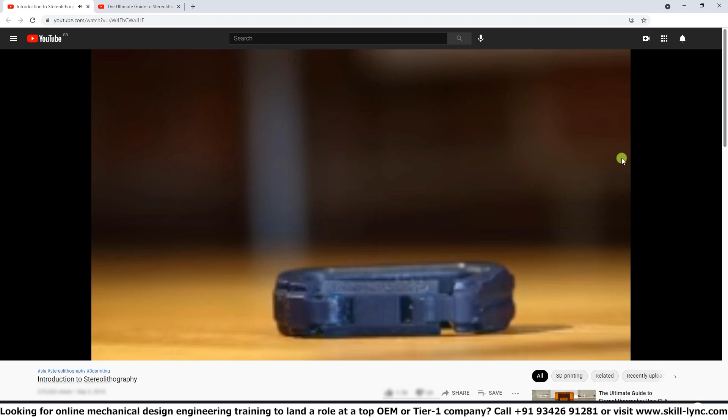And this has been a different kind of resin that's more solid. It's a bit stronger, more resilient to impact, right? It's not flexible or soft. You can hit it with a hammer and it can take the shock and impact of that.

See, so over here, what they're showing in the video is, if I can go back one frame, this part has been produced through stereolithography, so you can sort of see that the surface is quite smooth, whereas this part over here has been produced using fused deposition modeling. So what we previously discussed, yeah, with melted filament. And you can see the surface finish is not of the same grade. That's one of the main differences, or why you would select stereolithography over fused deposition modeling.

But again, there are some disadvantages of SLA which would lead you to choose fused deposition modeling over SLA, such as always having the need to post-process your parts in SLA. Sometimes in fused deposition modeling, you don't need to post-process your parts, right? If you're happy with the surface finish, or if you want just a quick rough part to be produced, you can do that. With SLA, you still need to rinse off all of the excess resin and whatnot.

And also, SLA produced parts are prone to UV degradation. So if you wanted to put your SLA parts in direct sunlight, they will change color, they will become brittle, they will actually degrade over time because of those UV rays present in sunlight. Whereas in FDM, thermoplastic filament, it's more sensitive to heat, right? Because you use heat to melt it.

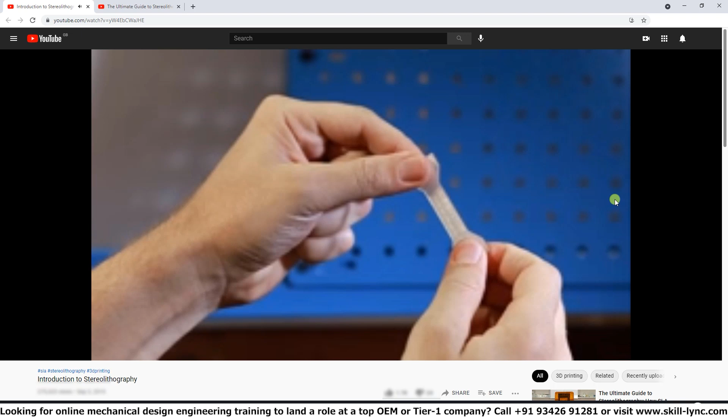Here, what they did is they produced this using FDM, using thermoplastic filament. So they just showed how weak the layer lines are, how weak the bonds are between the layers of the 3D printed model. It's quick to snap, because obviously you print one layer, and before you print the next one, this layer has already cooled partially. When you deposit the next layer on top, they don't fuse together 100%, they only partially fuse together. So that introduces some level of weakness along the build direction.

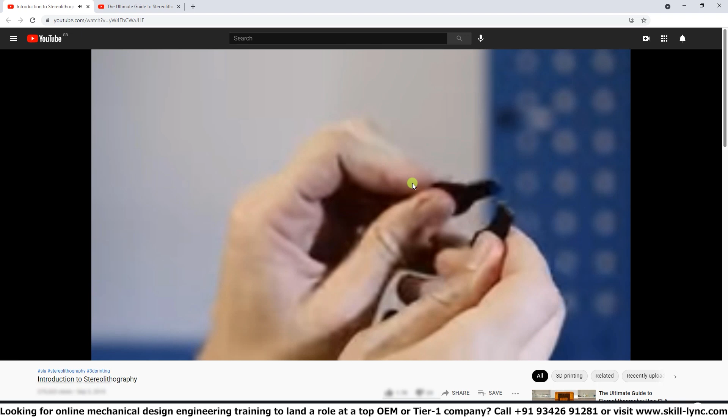Whereas SLA produced parts, because it's a chemical reaction the resin has with the UV, it's not melting, it's actually chemically hardening each layer on top of the next. They fuse much better. So as you can see, it doesn't snap as dramatically as the FDM produced part. But it also snaps. They're also relatively weak as compared to selective laser sintering and selective laser melting, which actually use metal, and they also form much better bonds.

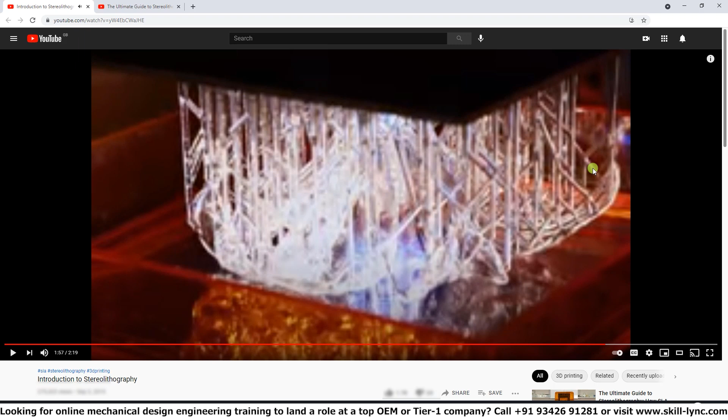So this is the build plate rising and pulling the model out of the resin bath.

So yeah, that's stereolithography. Let's see if we can get something out of the second video as well. So you can see this is not the actual printing speed. This is a sped up version of it. It's more of a time lapse.

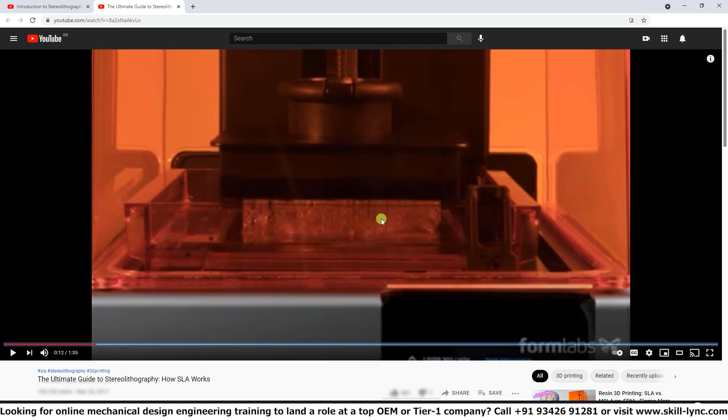Unfortunately, it's not as fast as in this video. This is a sped up version because otherwise the video would be 30 minutes, maybe 1 hour if it showed the whole process in actual real-time speed.

Because obviously it cures it with the UV laser, but then it needs to accurately move it out to prepare the next layer. It needs to wait a bit before using the laser again, and the laser needs to shine for a set amount of time into the resin for it to harden, right? It can't just briefly flash onto the resin.

It's a very controlled, accurate process: how long the laser needs to be shined on a particular area in order for the resin to harden. And there are differences between each type of resin that you obtain. You can change all of these parameters within the machine. Obviously, each machine is different and they have different powers of lasers.

So there are many differences between machines, between materials, between manufacturers that you can play around with and tweak in order to get the best built parts, the best effect or the best manufacturing process.

When you buy SLA machines, they give you an instruction manual. They give you some recommended settings. They give you some recommended materials or material suppliers to obtain the resins from. Some resin suppliers also give you some parameters to use with their resin, but experimentation is key in this part. Tweaking some of the parameters can help produce better parts, but this comes with many hours of experience using these technologies.

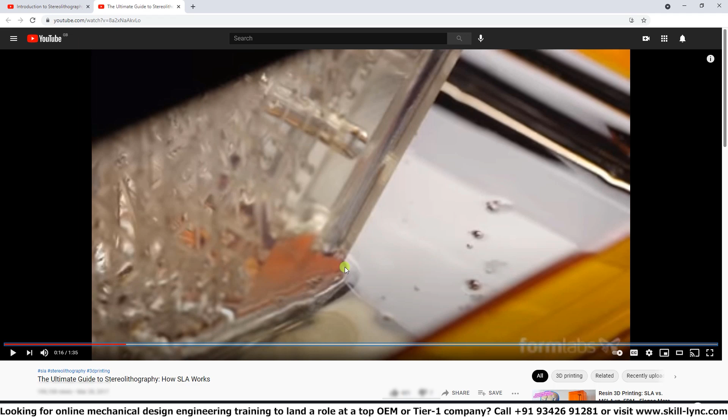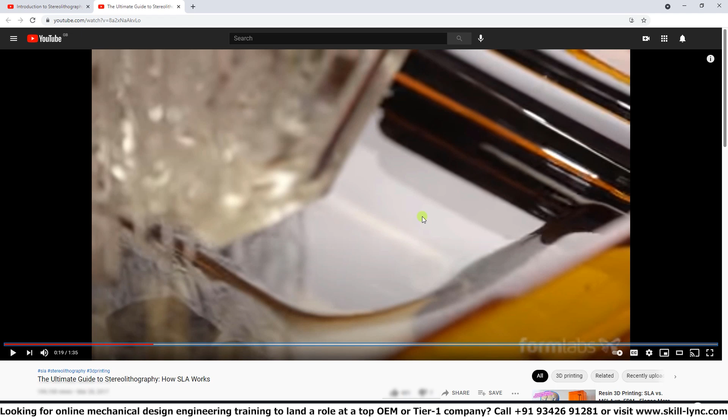Some stereolithography machines have a little roller, or arm, that goes across the surface in between layers to remove air bubbles in the resin, to smooth the surface, to produce better parts as well.

Some resin machines, you pour the resin, as we saw in the previous video. Some resin machines have cartridges of resin. So it's similar to an inkjet printer where you change out the ink cartridges. You can do the same with this stereolithography machine, right? You can insert a cartridge of resin if you don't want to pour or handle the resin yourself. But these tend to be a bit more expensive.

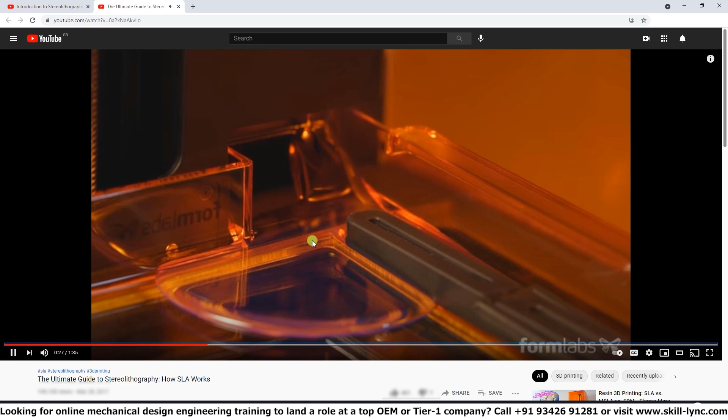Also, some SLA machines shake the resin bath a bit to get rid of bubbles that are inside, because you don't want to have a bubble in between your build plate and the glass, where the laser shines, because if a laser shines on this bubble, it won't harden it, right?

It might harden the surface around the bubble, but it will be an imperfection in your model, and it can look bad. It can produce a rough surface finish, and it can also make your model weak. So bubbles are not good in this situation.

This is how the laser actually shines through, and you have some mirrors that reflect and direct the laser to the specific areas that need to be hardened. If I go back a bit, that's the transparent window over here. So this is the bottom of the resin tank, and the laser lies underneath that.

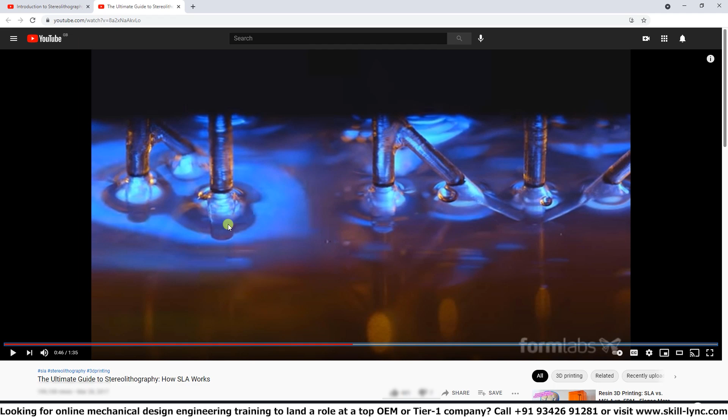You can see this bubble over here could actually produce an imperfection on this surface of the model or of the support structure, which is not ideal, but that's the laser tracing and hardening the cross section of the model.

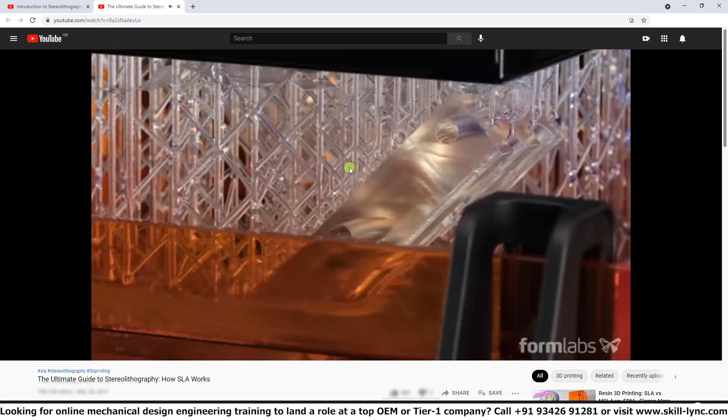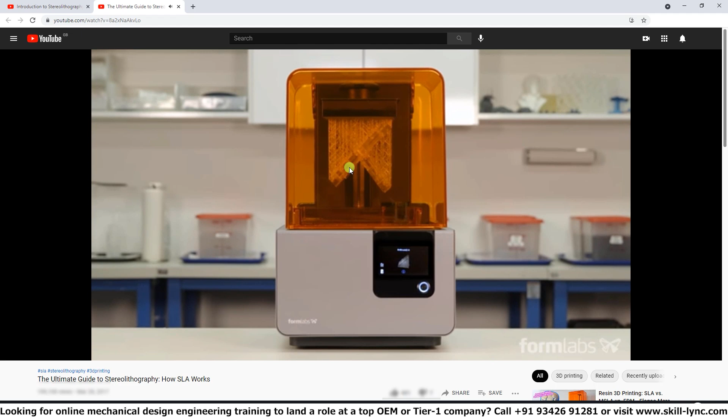So as you can see, the printed part will always be upside down, just because the build plate would be, let's say, the bottom of the part that you're building, and we'll pull it up. Again, you can see the support structures supporting each layer, because if you wanted to, let's say, harden this area over here and you didn't have support structures, it would just fall down and stay in the resin bath. Whereas here it can be attached to the build plate using the support structure.

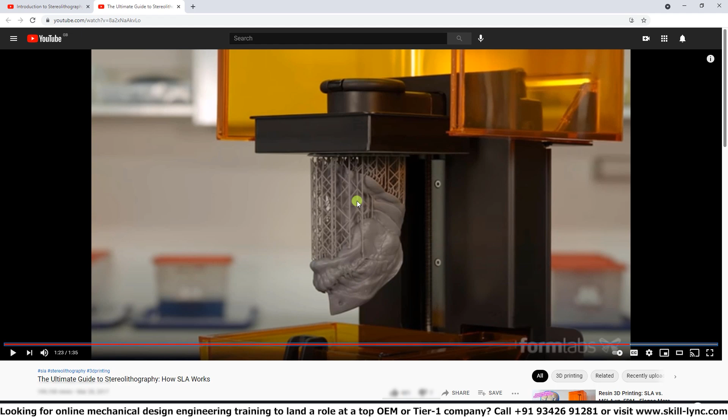So this is an element of design that needs to be considered when using this technology. You can see that most models tend to have these support structures included. Generally, in most cases, because you still need an element of post-processing for rinsing these parts, they tend to also add support structures. Might as well go all the way and add these features, because you'll be removing them at the end anyways.

So yeah, that's been stereolithography. Let's move on to the last technology, which is laminated object manufacturing. This is the one where you have laminate sheets that are cut layer by layer with a laser. This one is not as prevalent or common in the additive manufacturing environment. The main ones are FDM and SLA for hobbyists or enthusiasts, and professional versions of these are used in industry as well to produce models and end-use parts or casting molds and whatnot.

Selective laser melting or sintering is not available to hobbyists or consumers just because of the price. They're several thousand dollars. The equipment and the powdered material itself is also expensive, but they are very prevalent in industrial applications. Laminated object manufacturing, because of the bulk of the equipment, is not generally found in hobbyist or consumer environments. It's mostly industrial, but because of its limited applicability, there are limited industrial applications where this is used.

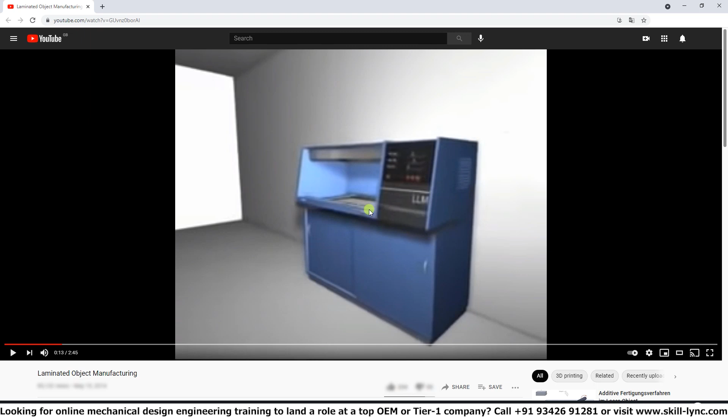Now, let's see if we can find a little video. Here they list it as layer laminated manufacturing, which is just a different way to say laminated object manufacturing, but it's all the same. So you can see this would be quite a bulky unit, because you need to store the layer rolls, the feed spool and waste spool, and as you will see, each layer has to be traced out. You trace out the box for the layer to remove it from the laminate roll, and that stays there, so it encapsulates the whole part in a block of material. You'll see that in this video.

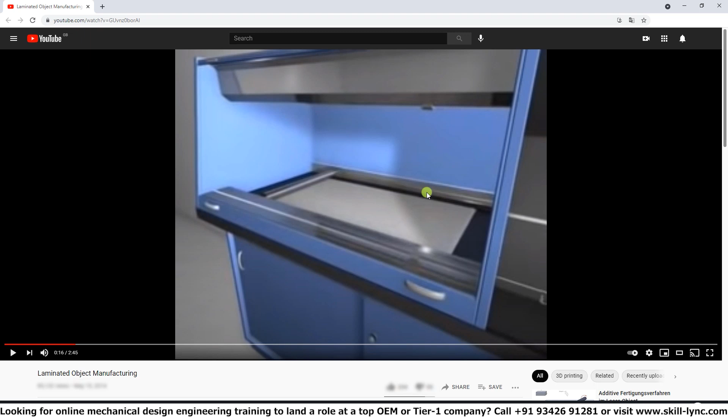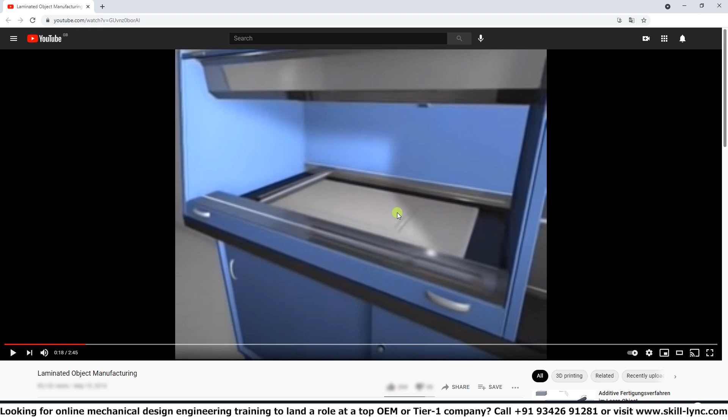Over here, the feed roll and the waste roll are in this cabinet underneath. You won't see them, you just see the workspace, and the sheet present in the workspace to be worked upon. Right now, you might not see it, but there's a laser here which is actually cutting the cross-sectional area and the box from the laminate sheet.

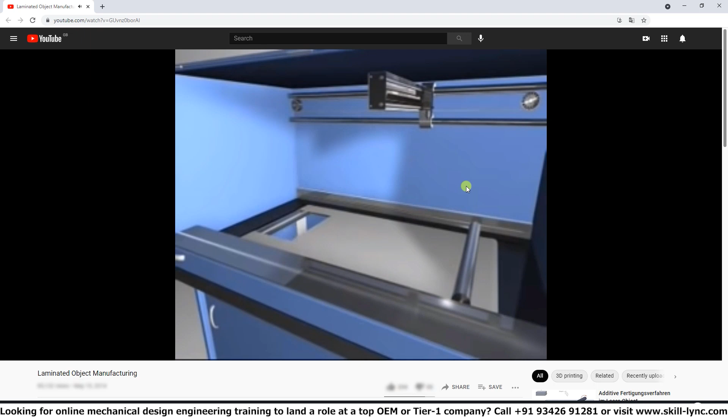And then it goes down, and as you can see, it traced a little square encapsulating area for this layer. As it moves on to the next layer, it moves the build plate down one layer, rolls a fresh layer of the sheet, moves a heated roller on top to melt this new layer onto the old layer, and now with the laser it will trace the new cross-sectional area, cutting it into this second layer. And it keeps going back and forth until all the layers are complete.

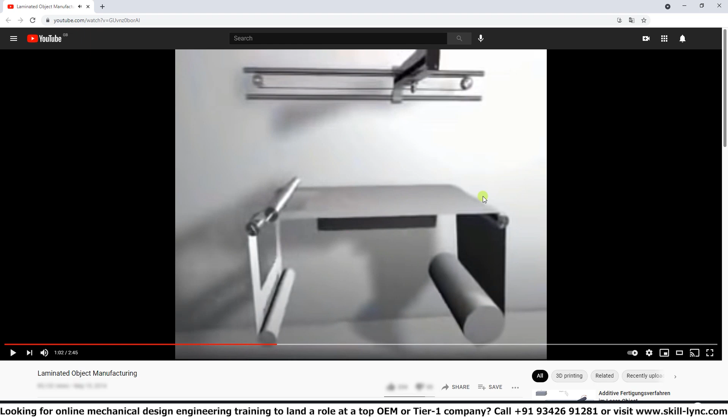Okay, now we can see behind the scenes, behind the cupboard: the feed roll, the waste roll, and how for each layer a square is cut, because it has to bond to the previous layer, so it helps with removing the part from the whole block, since the heated roller bonds each sheet of laminate material to the previous sheet. And it always cuts the same cross-sectional area of the block because it's melted on top of the previous one, to be able to move the layers down.

Again, as per most models, it has 2 degrees of freedom over here on the laser, the back and forth and towards us and away from us sort of movement, so the X and the Y. The Z again is produced by the build plate moving down.

These lines, it hashes, it creates a grid around. So this is over here in the center, that's the cross section of the part per layer that we want, and this cube or grid around it, it's sort of splitting the surrounding area in the layer to be able to be removed more easily.

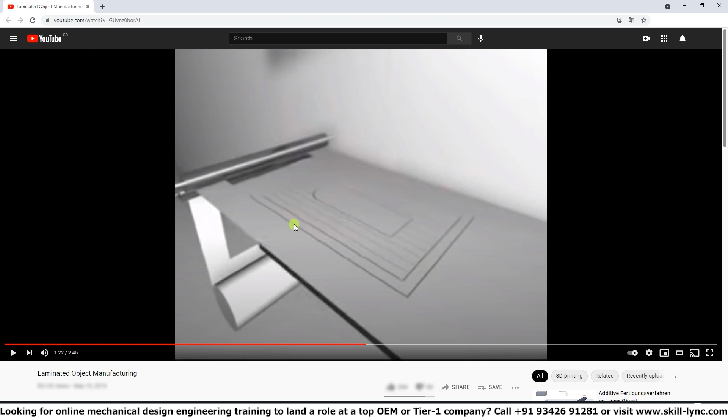Obviously, it cannot just cut the layer itself. It needs to cut the whole block, because if you imagine, let's say, you're creating, as an example in geometry, an upside down pyramid, because each layer the cross-sectional area is larger than the previous layer, this would jam the machine. It wouldn't be able to actually pull the layer down.

So using this method of actually cutting out the whole rectangle to create a block, this gives us more freedom of geometry, although post-processing will be a lot more difficult. You'll see once all the layers have been completed how we can actually remove it. So obviously you don't generally see the feed and the waste rolls, you just see the workspace environment.

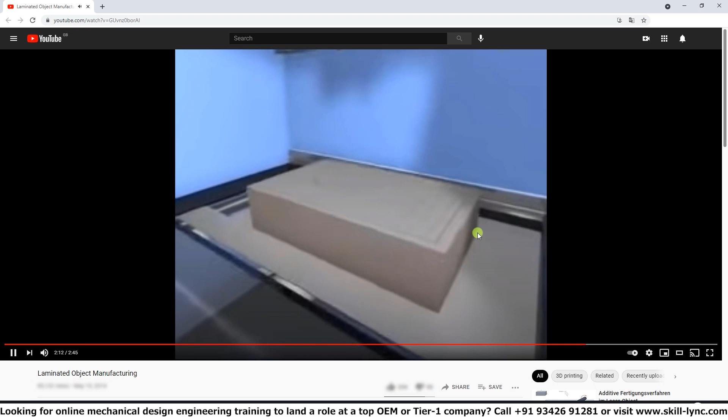There we go. So over here, this is the block that contains our model that's produced at the end. And as you can see, because you cut a grid, it's easier to remove all of the excess material and remove your model out at the end.

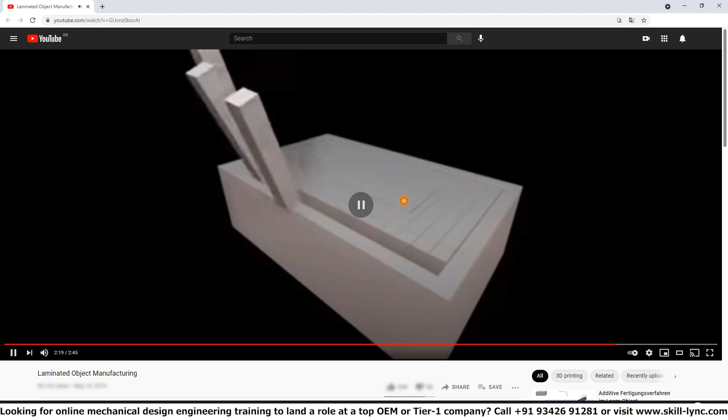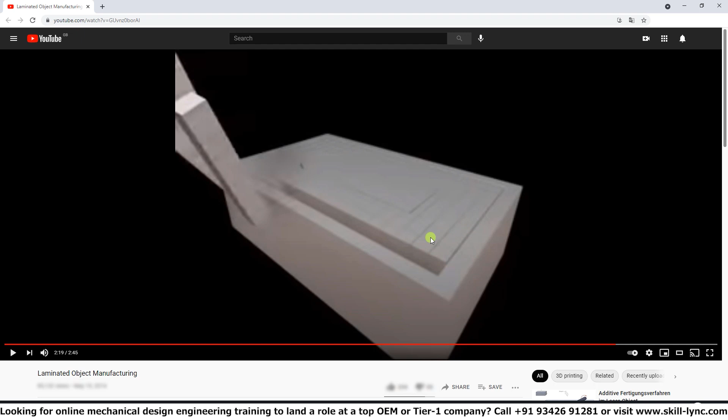But because the cube that contains your model has to be relatively large in laminated object manufacturing, this can lead to a lot of difficult post-processing, because you have to remove all of the surrounding material that's not part of our end model. And then we can remove our model and trim away all the excess material from our model, until we end up with our finished model.

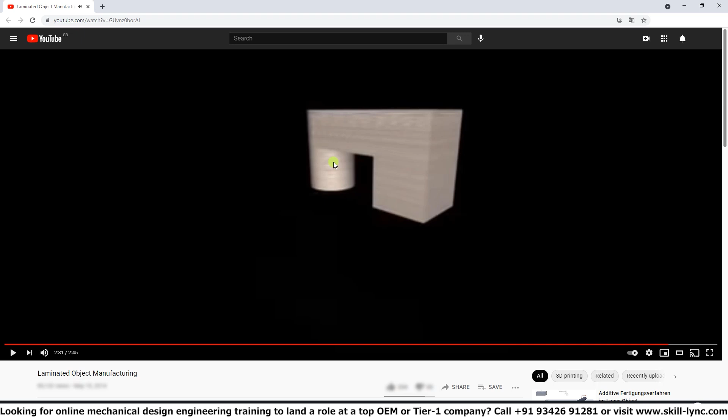So obviously laminate object manufacturing is not as commonly used as the other additive manufacturing technologies, but it also has its purpose. It's used in certain industries such as the architectural industries, where they produce models of buildings or models of cities in city planning environments. It can produce these much faster than the more traditional hand crafting style of producing these models.

So this can minimize the amount of human time needed to produce these models. Generally you need a very experienced architect to produce these models, whereas here you can design them in 3D rather than physically sculpting them. So there's less artistic or technical skill needed. You just need CAD software familiarity, which can be learned much faster and requires much less practice to produce such nice components.

And to actually remove the components from the laminate object manufacturing block, that's much less skilled labor. Pretty much anyone can learn how to do that relatively easily. So, applications of laminate object manufacturing.